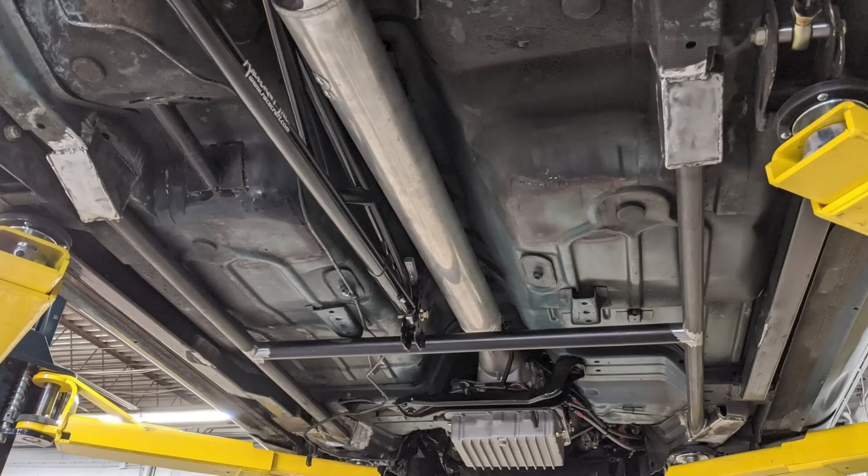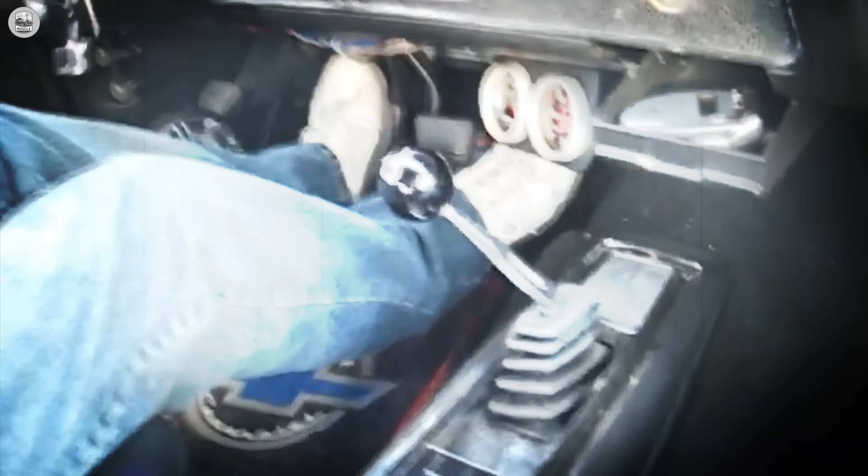The frame alignment secret. Why most restored muscle cars drive worse than they did in 1970. What if I told you that the reason your $100,000 restored muscle car wanders across the highway lane is not a worn steering box or cheap shocks?

If you are about to weld subframe connectors onto your car, or you just bolted in a full set of polyurethane bushings to fix a sloppy ride, you need to pause. The instability you feel when you hit a bump at 60 miles per hour is often a structural error made while the car was simply hanging in the air.

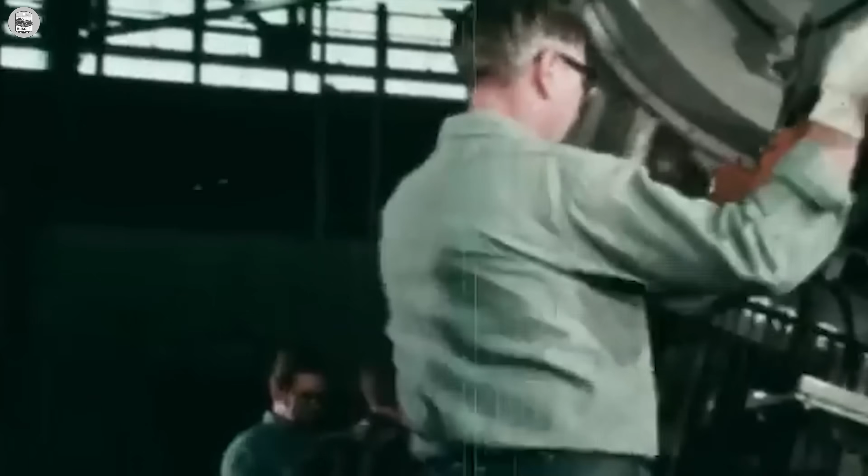In the right hands, a 1970 chassis was a highly capable track platform. Engineers at the Norwood plant did not build rigid tanks. They built a system. But today, builders toss the original assembly methodology aside. They blindly weld reinforcements while the car sags unsupported on a two-post lift, permanently locking a twisted structural error into the geometry. Today we are conducting a forensic audit of muscle car frame alignment.

We will look at the exact factory measurements and show you why bolting modern rigid parts to an unsupported vintage unibody creates a wandering boat. Before you drop your car off at the chassis shop, watch this breakdown.

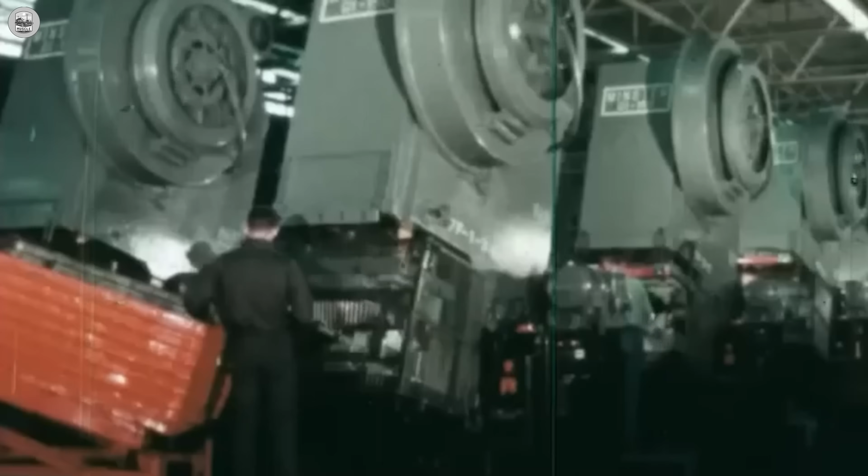Many builders operate on the assumption that a 1970 chassis must be engineered to the rigidity of a modern steel beam. To understand why modifying this structure causes dynamic instability, we must examine the 1970 Norwood assembly line and Pontiac Special Projects engineer Herb Adams. Adams was engineering a platform to compete with the track-focused Ford Mustang Boss 302.

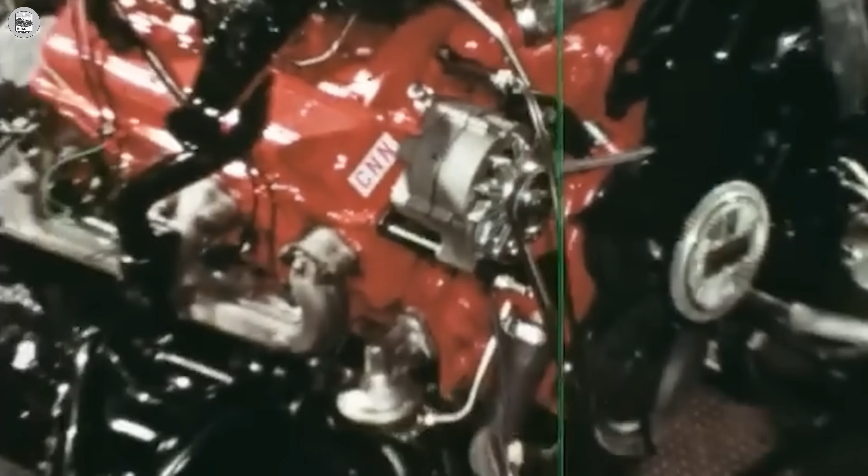Pontiac even utilized a legal provision by paying the Sports Car Club of America a $5 royalty per vehicle to use the Trans Am name on a production car. This tied showroom production directly to racing homologation. Modern shops look at the C-channel frame and assume it is weak.

Engineering records show Detroit built a calculated flex variable into the chassis. The structure was mathematically designed to twist mere millimeters under load, acting as an undamped secondary spring. This allowed the car to absorb the extreme rebound forces that tall bias ply tires could not handle.

Forensic review of internal documentation reveals a significant conflict between engineering reality and corporate messaging. General Motors management and marketing departments deliberately suppressed the mathematical flex data from public release. The marketing division insisted on promoting an image of rock-solid durability to the general public.

Corporate leadership calculated that advertising a dynamically bending chassis would trigger mass warranty claims from consumers, who routinely equated flexibility with structural failure. Consequently, the engineering team was forced to implement this critical dynamic geometry in absolute secrecy, leaving the math out of sales brochures and hiding it within restricted engineering binders.

The performance data validated the engineering approach. The 1970 Trans Am achieved a 14.02 quarter-mile at 102 miles per hour, while the Mustang Boss 302 ran 14.8 seconds. The Trans Am also generated approximately 0.80 g of lateral acceleration. This capability required absolute geometric control.

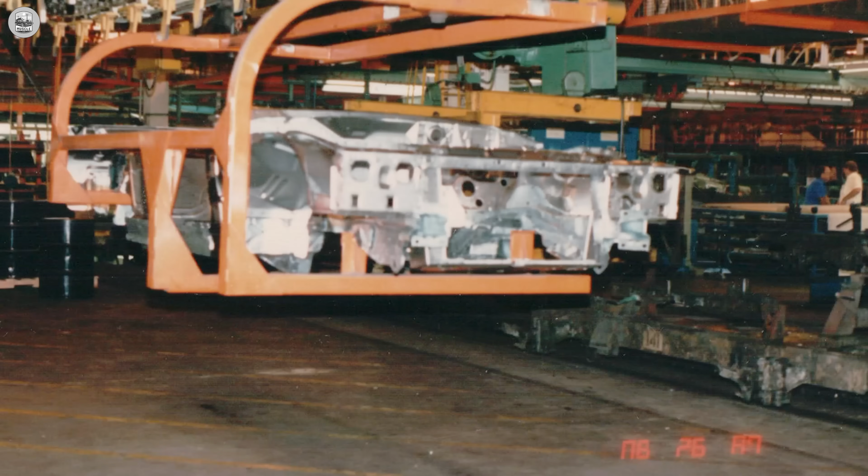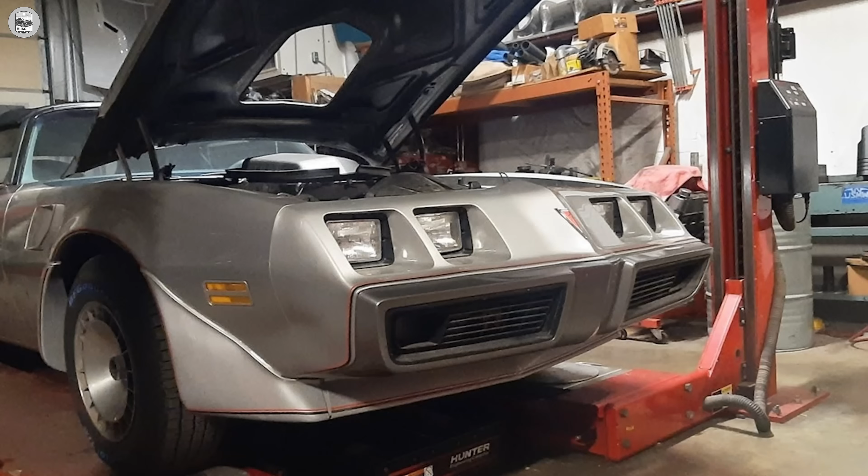At the Norwood plant, bare shells were clamped into multi-ton steel frame jigs, and the factory method secured specific datum reference points to maintain a strict cross-car tolerance of plus or minus 1.5 millimeters before a single body panel was welded. Today, a body shop will strip that 50-year-old metal and hang it on a rotisserie.

Gravity sags the unsupported chassis for months. Welding new floors into that state does not upgrade the geometry. It permanently alters the kinematic baseline of the vehicle and creates the wandering handling issues you experience on the road.

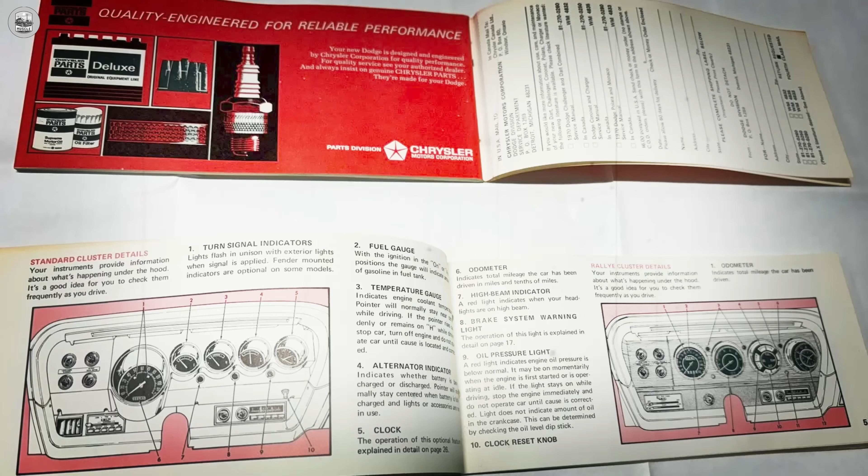Open any aftermarket catalog, and they will sell you on polyurethane bushings. The pitch is simple. Stiffer is faster, rubber is dead. It's a brilliant marketing illusion that is quietly assassinating your restomod's dynamic geometry. Let's look at the cold forensic data.

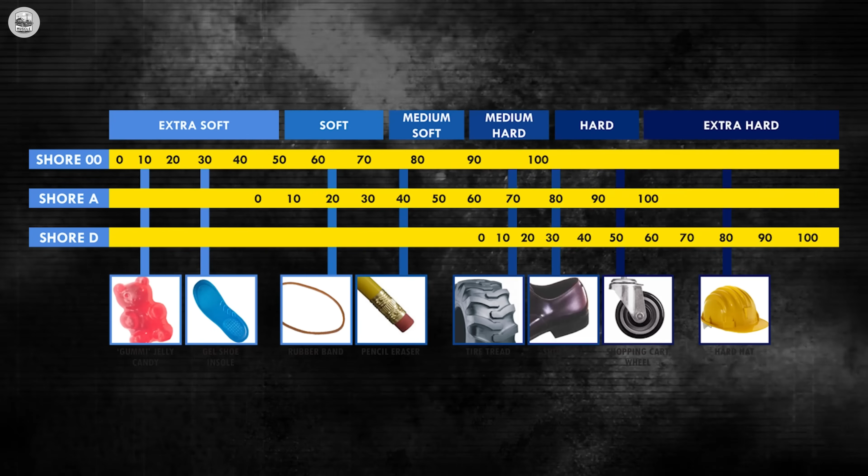Natural OEM elastomer rubber sits at a 50 to 60A durometer scale. It was engineered not just to pivot, but to deflect across multiple axes. Aftermarket polyurethane clocks in at a rigid 80 to 95A. When you shove 95A poly into factory 1970 control arms without recalculating the roll center, you trigger catastrophic suspension bind.

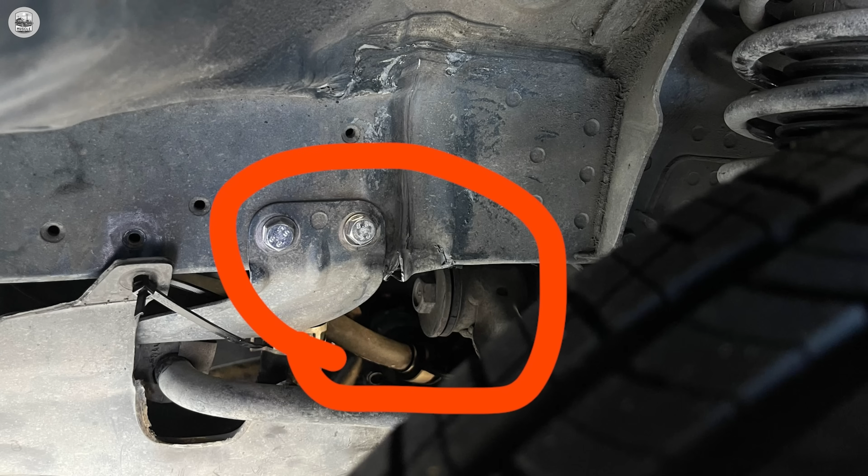Here is the terrifying math. Tests prove that a standard two-piece polyurethane bushing can require over 124 foot-pounds of torque just to force a control arm to rotate a mere 5 degrees. Your suspension is no longer absorbing the track. It's transmitting every violent lateral G-force directly into the vintage sheet metal.

Even Herb Adams, the architect of Pontiac's handling dominance, publicly refused to use urethane leaf spring mounts on street-driven cars because of the extreme harshness. Why? Because Detroit engineers exploited a brilliant mechanical loophole: compliance steer. On a 1970 Camaro Z/28, they deliberately utilized rubber's predictable deflection under heavy cornering loads to pull the front wheels into a slight toe-in.

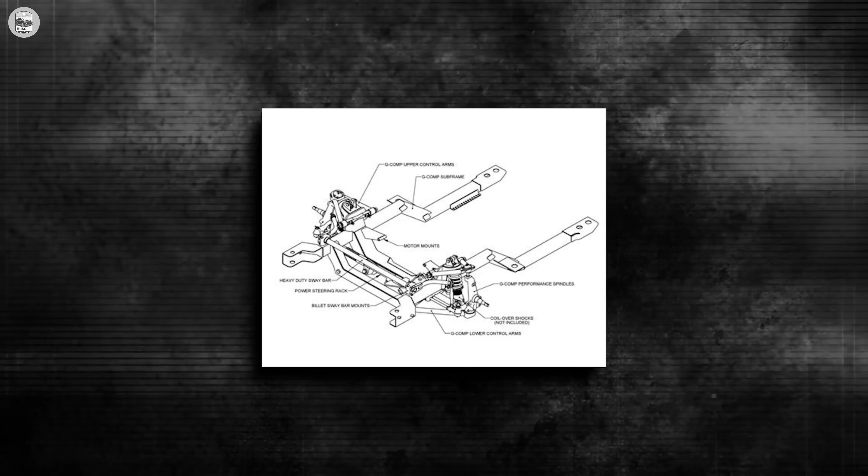This engineered distortion created a survivable understeer at the limit. When you bolt in rigid poly, you delete the factory's hidden safety net, transforming a balanced weapon into a snap-oversteer liability the second you push it hard.

Many builders install 2-inch lowering springs to achieve an aggressive stance on a 1970 F-body. This aesthetic decision initiates a geometric collapse known as camber curve inversion. The factory's short long-arm suspension was mathematically designed around a specific ride height to work exclusively with the bias ply tires of that era. When you drop the chassis by 2 inches without physically relocating the upper control arm mounts, you push the front roll center completely underground.

During cornering, a properly engineered suspension compresses and generates negative camber. This keeps the tire flat against the pavement. The lowered factory geometry does the exact opposite by creating positive camber gain. The top of the wheel tilts outward and violently lifts the inner edge of the tire off the asphalt.

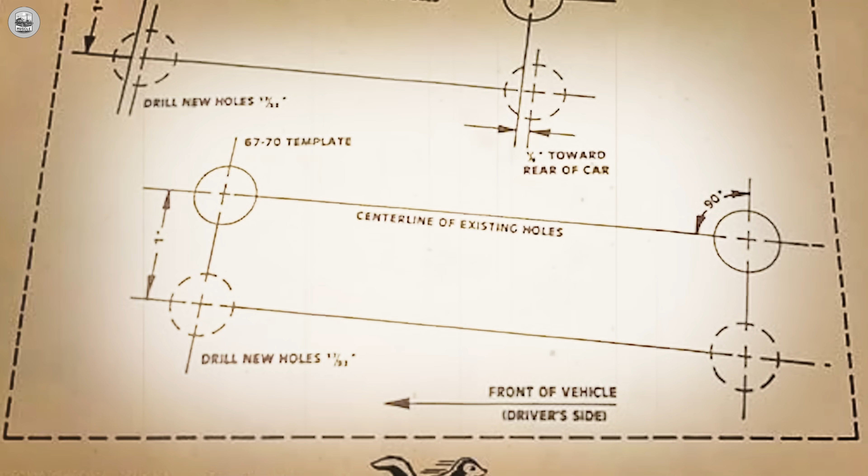Ford and SCCA racers knew about this fatal flaw early on. Ford suspension engineer Klaus Arning mathematically proved that simply lowering the car ruined dynamic handling. His mechanical loophole was the Arning drop. He relocated the upper control arm mounting holes exactly 1 inch lower on the shock tower. This tiny geometric shift mechanically forced the camber curve back into the negative spectrum.

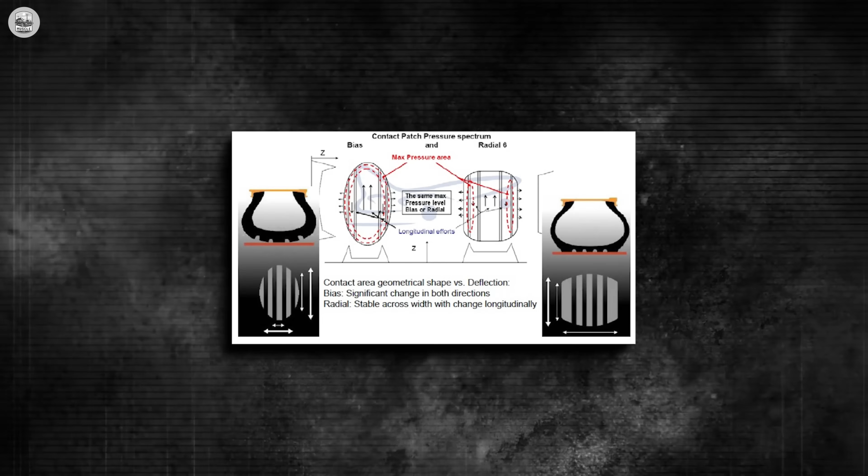Modern builders often ignore this math. They just install shorter springs and bolt on modern radial tires. In the factory era, tall and flexible bias ply tires absorbed geometric flaws. The tire sidewall physically distorted to maintain road contact and acted as an active suspension joint. Modern radial tires feature rigid sidewalls that demand a perfectly flat contact patch. When a lowered suspension forces a modern radial into positive camber, the effective contact patch shrinks by up to 50%.

And this geometric failure explains why a stock 1970 Trans Am could pull 0.80 G on a skid pad, while a modern lowered build plows into severe understeer at 0.70 G. The forensic solution is not stiffer springs, but correcting the fundamental suspension math.

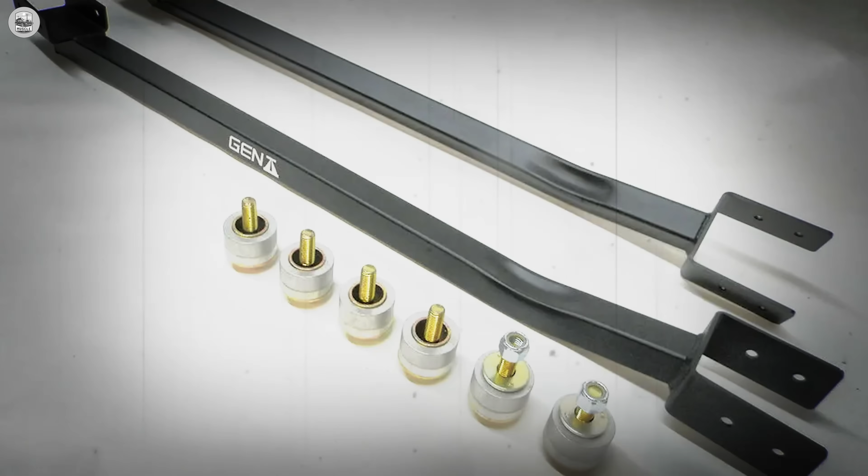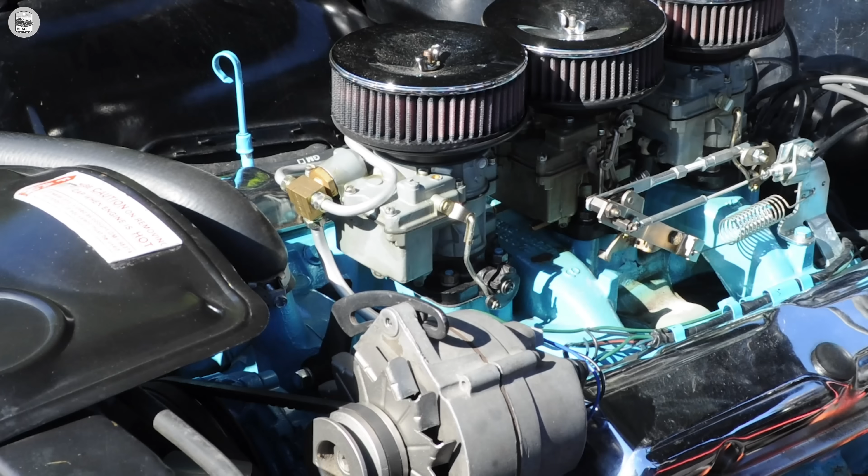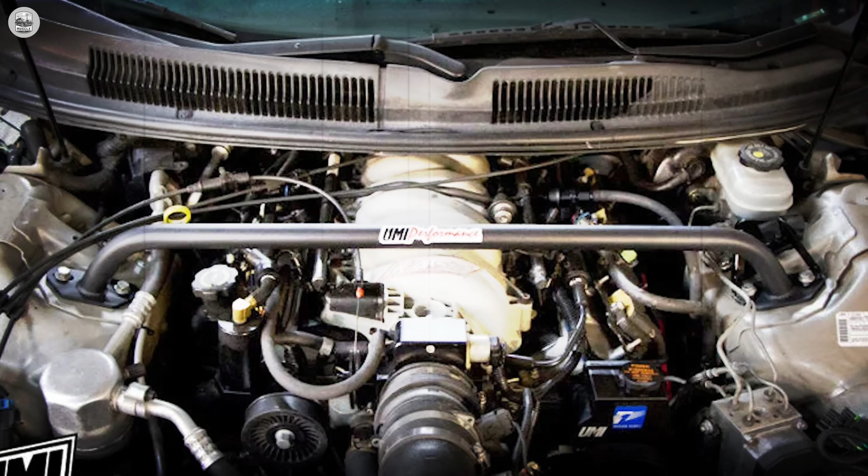Subframe connectors are a standard structural upgrade for vintage unibody vehicles. A critical process control failure frequently occurs when shops install them using a standard 2-post lift. With the wheels suspended in the air, the unsupported mass of the cast iron V8 engine and the solid rear axle induces a longitudinal chassis sag. Recall that Norwood factory datum points maintained a strict cross-car tolerance of plus or minus 1.5 millimeters. Forensic measurements demonstrate that simply lifting a 1970 F-body off the ground on a 2-post lift can spread the distance between the front shock towers by up to 6.35 millimeters.

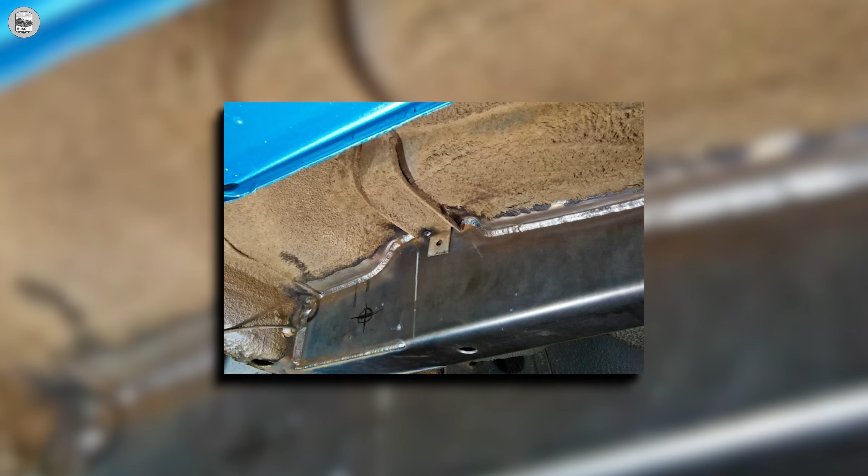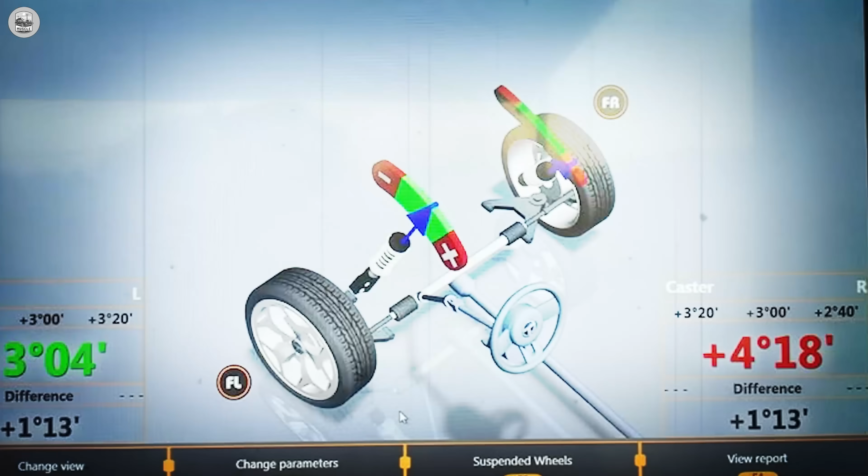Applying a permanent weld to the subframe connectors while the vehicle is in this deflected state locks the chassis into that unnatural geometry. When the vehicle is lowered and the suspension is loaded, the unibody cannot return to its static baseline. This results in permanent alignment discrepancies, such as caster angles mismatched side to side by over 1 degree. These deviations cannot be corrected with standard camber bolts. Operational symptoms include doors binding when parked on uneven surfaces and unexplained stress cracks appearing in the windshield glass. This is a procedural error, not a defect in the aftermarket component.

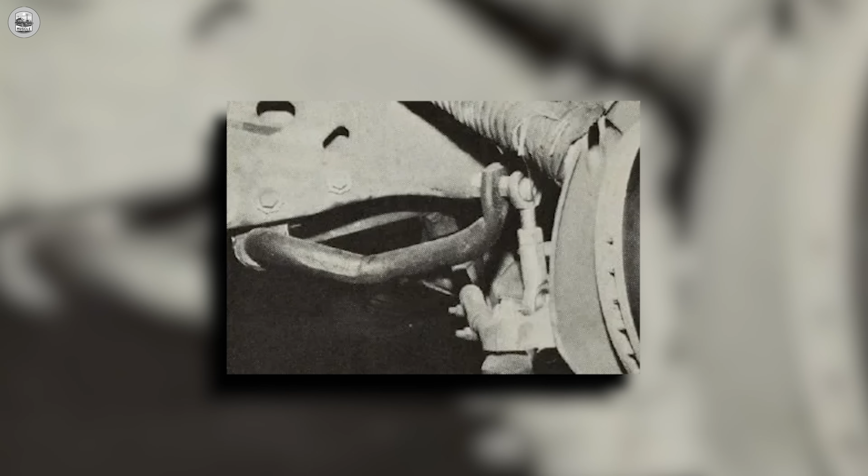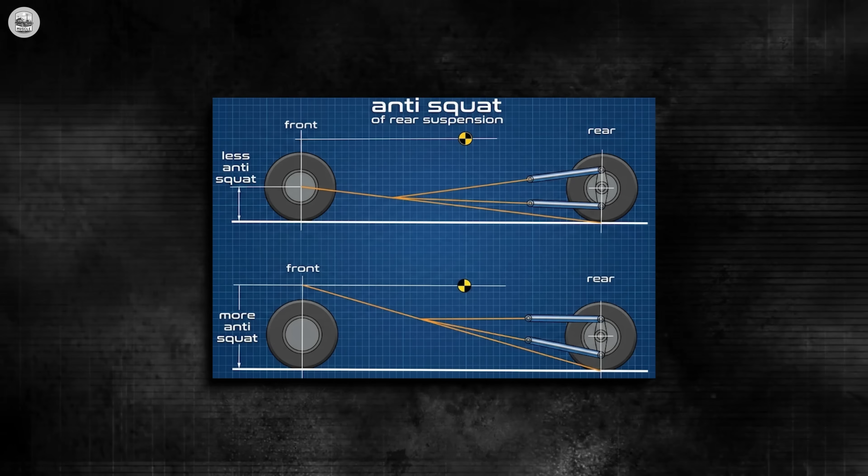Contrast this procedural error with intentional geometry manipulation from the factory era. When Herb Adams needed to alter the Trans Am launch characteristics, he utilized a calculated mechanical loophole, now referred to as the Herb Adams mod. He relocated the front leaf spring mounting point 19 mm to 25 mm higher into the chassis structure. This specific adjustment shifted the suspension instant center backward and lower, significantly increasing anti-squat and traction on corner exit.

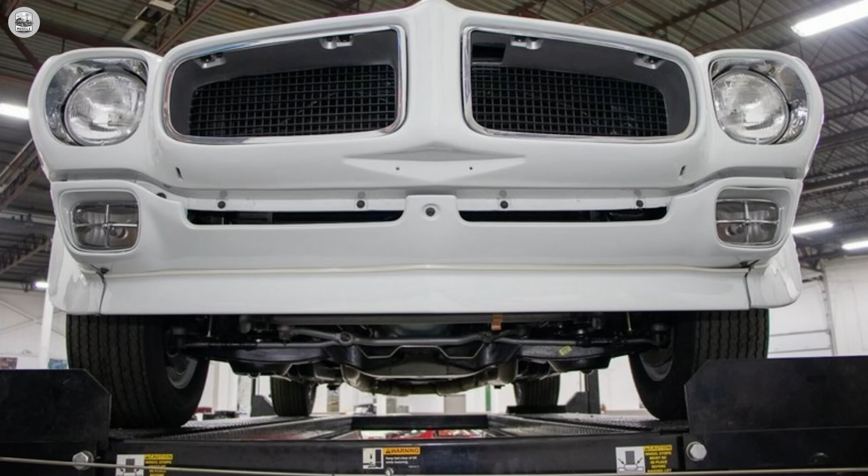To achieve the necessary clearance, the floor pan directly behind the driver's seat had to be cut. Adams fabricated discreet steel covers to conceal these modifications from competitors, presenting a geometric advantage as pure engine performance. That is engineered chassis manipulation. Welding a deflected chassis on a two-post lift is simply a structural compromise.

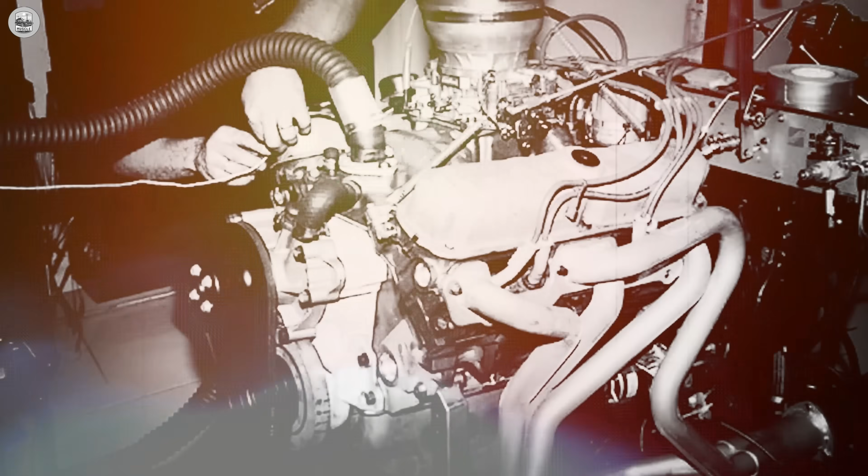The Restomod industry often ignores foundational engineering. Enthusiasts obsess over the 450 horsepower of the 1970 Chevelle. Detroit tested those engines in sterile labs. On the street, that rating drops to roughly 285 horsepower. Dropping a modern 600 horsepower engine into a fatigued unibody induces severe structural stress. Builders defend these setups by claiming the car drives straight on the highway. Static alignment means nothing when dynamic geometry collapses mid-corner.

Conduct a forensic structural audit today. Park on an uneven surface. Binding doors indicate a twisting unibody. Measure the exact distance between the front shock towers resting on the tires and then suspended on a two-post lift. A 6.35 mm variation confirms fatal chassis sag. Halt welding immediately.